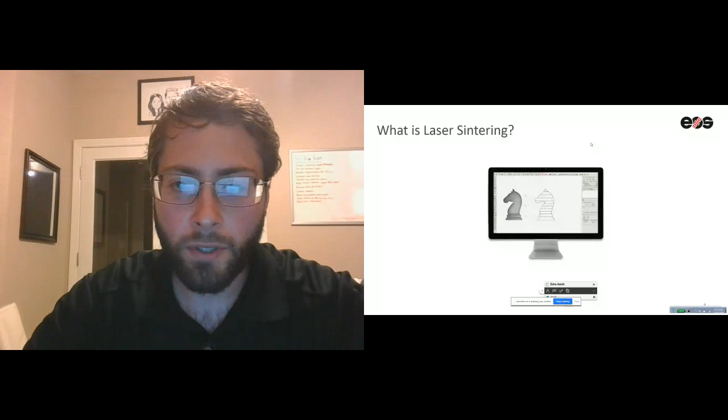So what is laser sintering? How does it differ from other technologies? Well, the first thing is it's powder-based—both polymer and metal, it's a powder-based technology, traditional to how other additive technologies work. We operate from a digital file, usually an STL, which is loaded onto the machine platform.

The way this works is essentially you're building your part in a lowering build platform. So what this means is we're recoating powder into a fine detailed layer, and then using a laser to scan the pattern within the file we're uploading. The platform is lowered roughly every layer—usually most materials are 120 micron layer thicknesses. We recoat either with rollers or recoater bars on some machines, and this process works over and over again until you get your part.

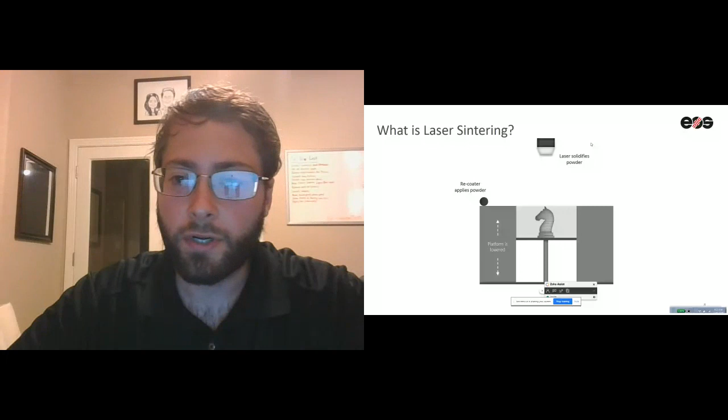As you'll notice, the part is encompassed in powder at the end of your build. So essentially there's no supports required because there's not a bunch of free weight and stresses in your material. Also, at the end, you break your parts out of the free, unmelted powder—you raise your part up to the top and then remove the powder.

So what are the advantages of laser sintering? Some of these are typical of additive manufacturing in general, some are more exaggerated with laser sintering. Lightweighting parts—there's a large material variety in laser sintering, especially in how we can composite our materials to lightweight them. Through design interface, we're able to reduce mass from parts and add mass where more structure is needed, so we can lightweight parts while maintaining performance. Integrated functionality: how can we reduce parts that typically in an assembly might take 30 different parts? How do we reduce this to cut complexity, lead time, and costs in the supply chain and manufacturing assembly, also reducing tooling cost and human cost?

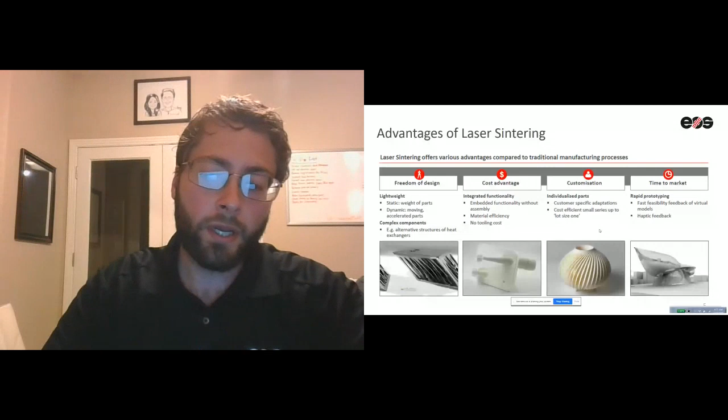Individual parts, so we can build a relatively large amount of parts, but with a very high amount of customization. This is one of the things I'll touch on soon, and also rapid prototyping. How do we then build our designs faster, build our products faster, and validate them via testing and rework?

So that's kind of the technical advantages of additive manufacturing, but the business advantages look very similar. Like I mentioned, redefined NPI process. So what this would mean is, as we're integrating new products, much faster testing, much faster validation, faster turnaround time.

The design for additive consolidation. So basically, how can we improve the way that we assemble parts? How do we reduce the variety and steps it takes to make a part?

Distributed manufacturing is, in a mass customized world, we can then allow ourselves to distribute our manufacturing to different localities to reduce lead times, to reduce logistics costs, and also often to offer customization in an area that may not align with the needs of customers in another area.

And also that just personal customization. How do we take user input data across many different industries? The sports industry is, I think, a very active area right now. How do we take user data and integrate that into a customized part, but also on a mass scale?

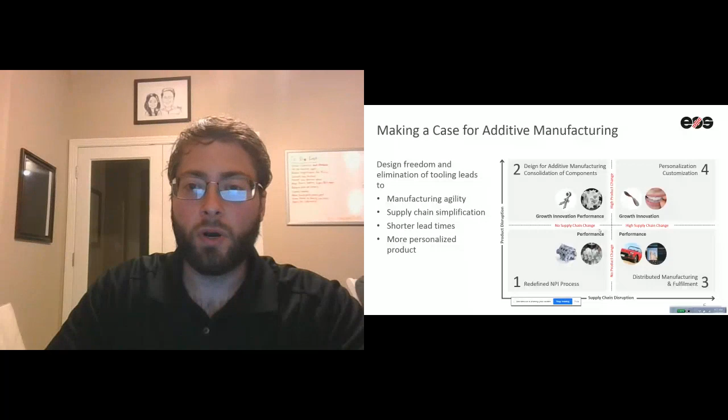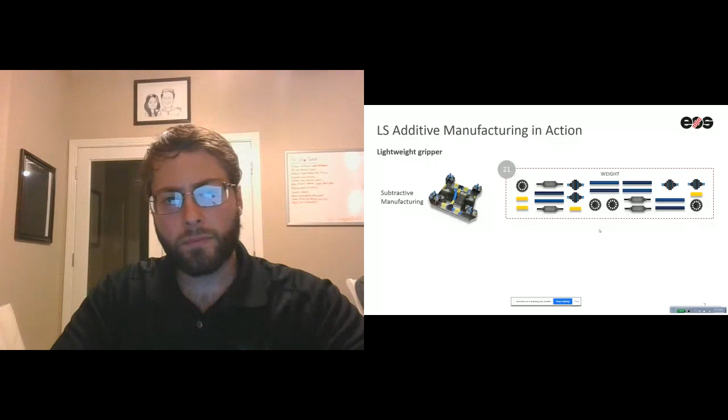So very, very simple application example I put in here just to kind of get my point across. This is a lightweight gripper that we helped redesign. Originally, it had roughly 21 parts because there was a lot of internal piping and hosing that needed to be in this component.

Through those sides, the corners, you essentially have these suction areas that will then allow it to grip on an assembly line and move a specific part around. We were able to work with this team to design these components to internally integrate those channels in the structure, reduce it to a 3-part component, and reduce the assembly and build time to 1 day from 18.

And so that was a huge lead time reduction, a huge weight reduction, 86%. And overall, when you include labor, lead time, and costs of materials, it's over a 50% cost reduction. So why am I talking about plastics today in general?

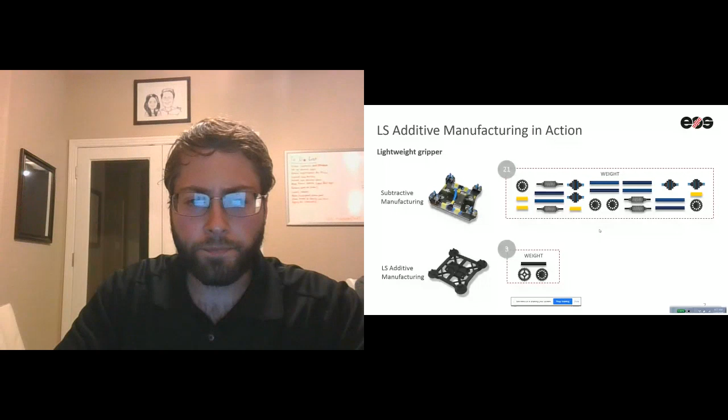Like I mentioned, we have a robust business in metal and plastics. The reason I'm talking about plastics is we see it as a huge opportunity in the industry. So I was looking at the volumes recently of what actual additive manufacturing volume-wise in plastic produces compared to the plastic industry overall. And roughly 1 in every 100,000 pounds of plastic material produced is used in additive manufacturing.

So when we're looking at this industry, it feels like it's growing, and it is growing very quickly. But there's still a huge opportunity just based on the fact that we're only one out of every 100,000 pounds going into our industry, and we think there's a lot of opportunity there.

And what does plastic bring that other technologies doesn't? It brings a lot of customization ability, and a lot of ability to maybe have a base resin, but also build on that base resin by offering different compounds and different things that will allow our customers to really hone in on the application requirements that they have.

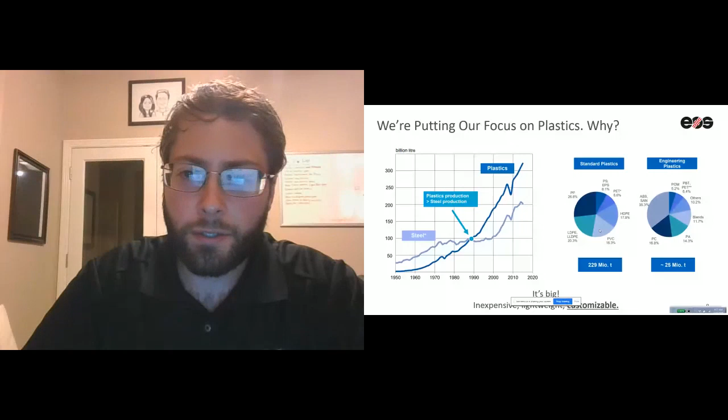So just a graph on the left, you can see this is general plastics versus steel. It's growing very quickly. We think it's going to continue to grow, and that includes standard and engineering plastics.

So what's been holding AM back in the past? Why are we only at one out of every 100,000 pounds in our industry? Well, it's really matching up that material choice with the machine availability that is one issue. So unlocking the ability to have a larger variety of materials in your build process.

There's been a slow growth of additive know-how and design compared to the technology overall, and that's something we need to continue focusing on. Events like this are great because you actually have a much faster adoption of the technology by getting 500 people in the same room watching the same events and learning together. That really accelerates the way that we all understand additive together. And really just a mindset driving that culture.

So at EOS, we do have a focus on new innovation, and we put roughly 15% of our revenue back into R&D. What that allows us to do is take what our customers are currently working on and discovering their needs are, and directly funnel that into our future pipeline so that there's not a lag in our products and a mismatch between customer demand and what we're offering.

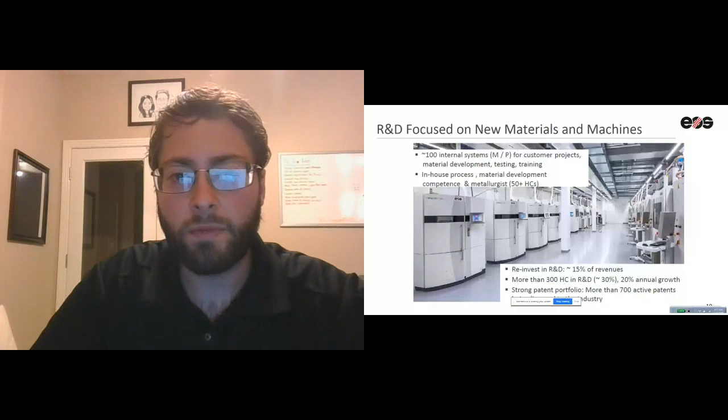So across the globe, largely Germany, and I'm in Texas. Here in Texas we have quite a few machines, and also in Michigan we have over 100 internal machines for building, testing, customer support, material development, parameter development, things like that, that we're actively working on.

So maybe some of you are familiar with our Formiga P110. It's a smaller machine, very fine details, and a very good machine for build features and build detail, all the way up to our production machines, which are larger platform.

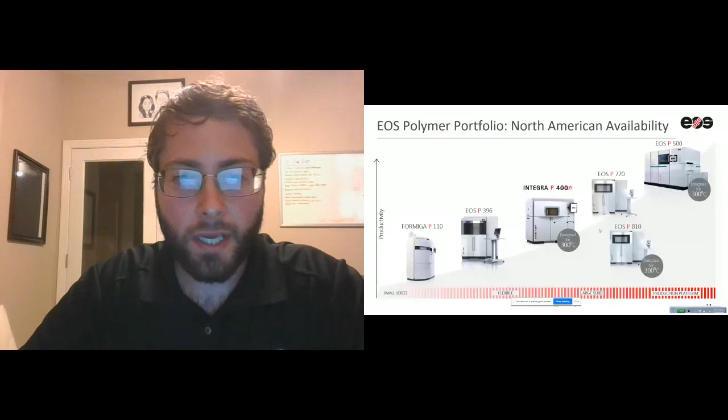And so I think the demand, honestly, of our customers over time has been, hey, we need more flexibility on what materials we can run in which machine. So our newest platforms are an answer to that, where we want to be enabling that material selection through new advanced and more flexible machines that can accommodate that.

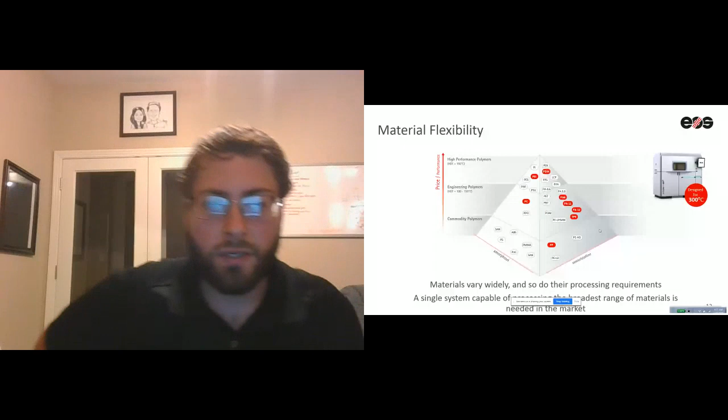And so a single system hasn't been able to this point to accommodate all materials, but we think that as time goes on, that's what our real strategy is, to increase the options that our customers have. So P4, P5, the P400 is released in North America, and we're shipping machines.

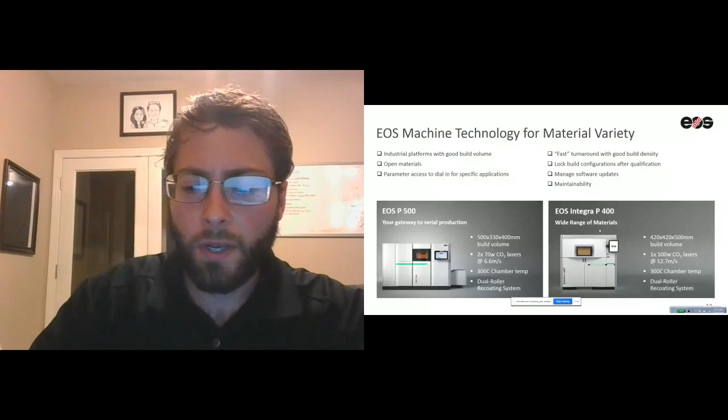That's the machine that we're really leveraging for some of our material development projects with our customers. So it has a roller system and a different powder feeding system and different heating system that's ultra sensitive, allowing us to develop new custom materials on there.

But we're also building into new material spaces, and so we're actively working on things like polypropylenes, which are more of commodity plastics that have not been on the market successfully in the past to release on our platforms, and also the polycarbonates and PA6s, all the way up to the PEKK composites we already have a product on the market. But we're still differentiating via the ability to change our filler content and the way we process parts to meet very specific opportunities of our customers.

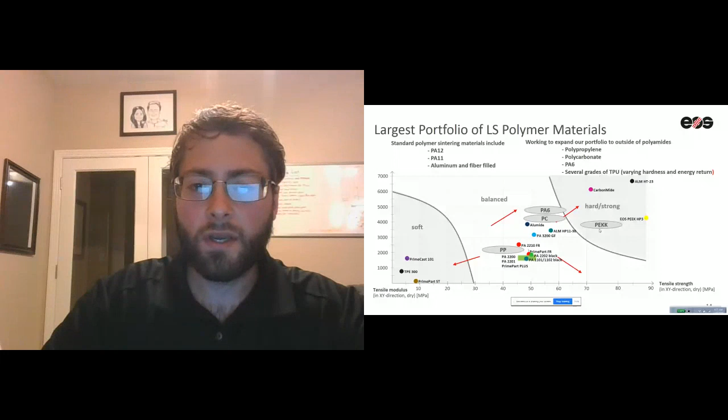One point I wanted to drive home is we're working on enabling a lot of different resin technologies on our machine. But really, if you take a step back, the base resin is just the beginning of the development. Take a PA11, for example. A nylon 11 has a relatively specific mechanical property range, temperature range, stiffness range, things of that sort.

It's only when you start looking into the filler content that we actually can unlock a lot of ability to customize for a specific application. Some customers want a material that is extremely stiff with no give whatsoever, and we have fillers for that, and we have processes to produce that material. Some don't - some need an ESD material, things like that.

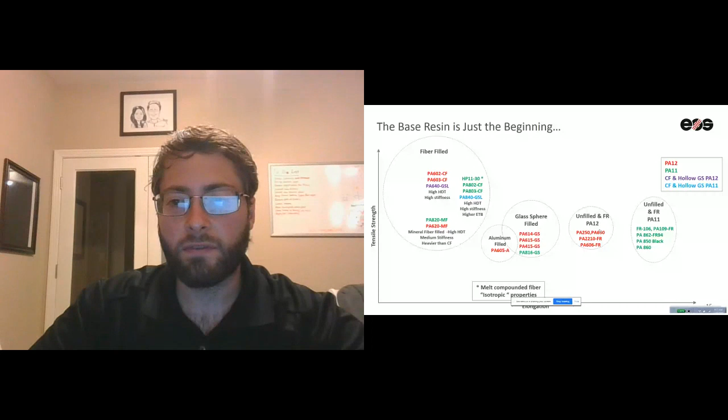So some of the material classifications that we generally work on are conductive. Often customers need jigs, fixtures, things like that, that are electrostatically dissipating, that don't build up charge and then dissipate rapidly - something that can continually not build up charge and release charge as that builds.

Flame retardancy is something we're continually building new flame retardant materials for applications. Different applications, such as aerospace, tend to use different flame retardant technology that maybe isn't appropriate for consumer electronics, and then there's consumer electronic type applications, which is different. UV stability, lubricated materials for high friction environments where we need to reduce wear on the surface, and generally reinforced materials for improving tensile strength, stiffness, and things like that.

One point I also wanted to make, one question we get a lot in discussions we continually have, is the injection molding conversation. I think this was made several times in a couple other talks during this conference I've seen.

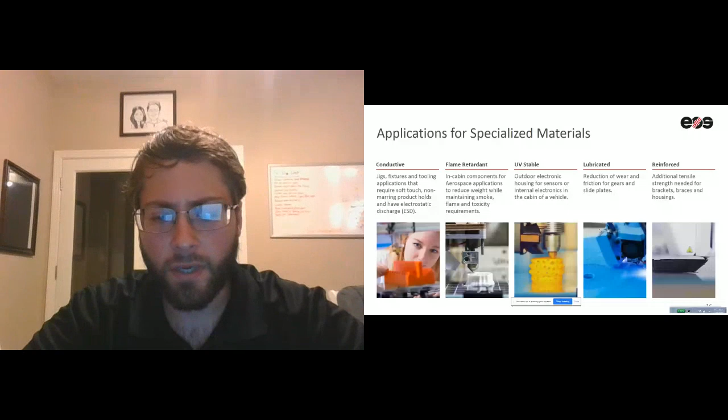3D printing, and laser sintering also, is not necessarily a direct replacement for all injection molding applications. It can be extremely complementary, whether it's a low to mid-size build for something that's ultimately going to be ramped up, or something that's never going to be ramped up because of the complexity of the parts, the turnaround time necessary, or the continual innovation on those parts. So we strongly believe it's not always one or the other.

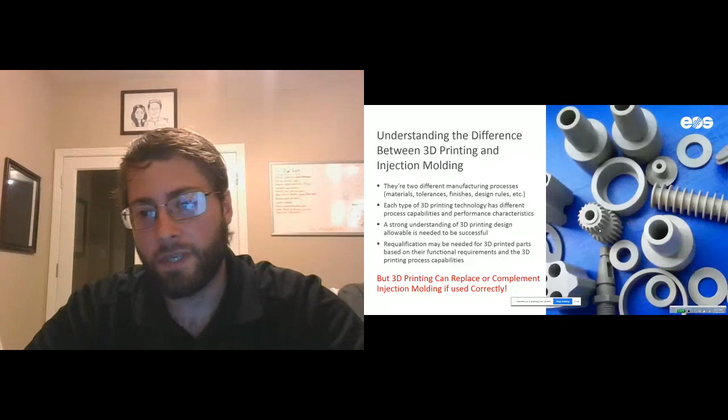They're often complementary. When we talk about materials, there very rarely is an injection molding material that is one-to-one with a laser sintering material. So when we're talking about a PA6 that's been in an auto spec for 50 years, it's not necessarily that if you find a way to powderize that material and throw it in a machine that you're going to get the same part performance. It could be that a completely different material with a filler content in it can achieve that same performance, but it might be a different base resin or something like that.

So what we're really focusing on is how do we help go from a concept with these toolboxes I've kind of overviewed in the past slides? How do we go from an idea, an application idea or application requirements, into understanding if our technology is going to be a good fit?

One way we do this is our applications group, Additive Minds, works with our customers to help understand not just the technology fit, but also the business case fit, and how we actually understand the costs from a holistic perspective besides just material, and how we understand the costs of integrating additive, and how we do that effectively. Often it's the case that we don't just need to show that we can build a part that meets a spec.

We also need to help qualify those parts internally for our customers. This is something we do a lot of work with our customers on, to not only drive the getting started on the applications and the part portfolio evaluation, but we also drive it through helping to set up facilities, production planning, and monitoring machine part performance.

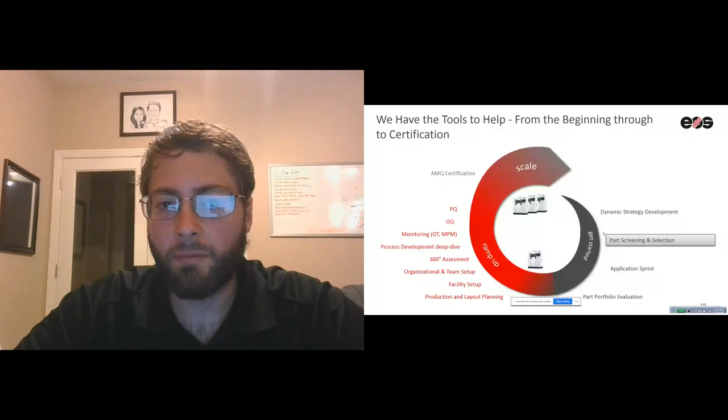The way we typically do this is by developing a custom development path for each application, for each customer, helping to screen the specific application and develop that through a custom roadmap, ramping up production, and certifying and scaling production. Often we're also able to assist with the ramp up of production by setting up a kind of internal incubator hub in which we'll develop the entire production process with our customers, and then transfer that process to them so there's less issues with the transfer and more knowledge share.

One of the ways we do that is helping to understand the cost internally for our customers, and how to generate value from building an additive part that maybe traditionally was built another way. Of course there's an added cost up front of additive manufacturing, some of the materials tend to be more expensive, things like that. But by improving upon the life cycle, the part performance, and things like that, we can achieve a net value if we're looking at our leading indicators and differentiators to help add that value. So there's a lot of value to be gained, but often you have to go and find it with additive.

Some of that comes through leveraging our ability to have almost limitless complexity. So parts that are high surface area to volume, things that traditionally you can't just pop into an injection molder or machining machine and build those parts. Customized lightweight construction and individualization are some of the things we really capitalize on to build that value.

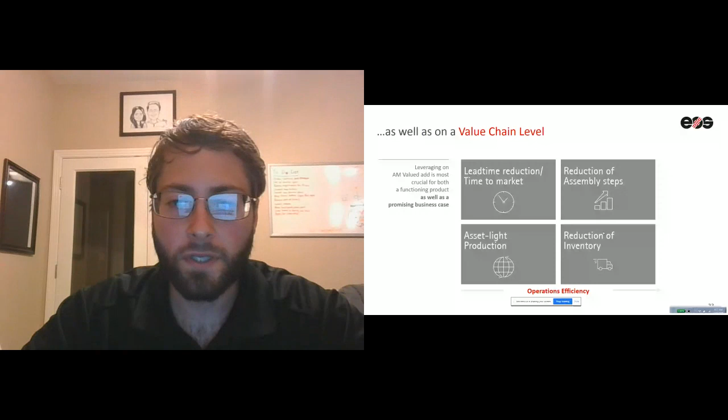On the value chain side, we capture that lead time reduction and reduction of assembly steps. I talked about that a little bit earlier. But it's really also not just a bill of materials comparison, like oh, this one's cheaper than this. It really comes down to the human capital, the ability to innovate, the reduction in inventory which frees up much more capital in our hands, and having generally less money tied up in production and storage of parts and spare parts.

So a typical roadmap would look like sitting down with a customer, understanding their applications, defining a project team, enabling through trainings and design for additive manufacturing understanding, but also digging deep into how we design our factory layouts, and what technical requirements the facility needs first in order to really streamline production in the future when production is on its feet and going at full speed.

And then we also work on application development and process parameters specific to that application and environment. That's often where some of the custom material development to meet a specific need comes in. Maybe we have a standard product that is within range of what we need for our application. Well, we have quite a few knobs and things we can tune on our material and process to capture the performance we need for a given product.

So I just wanted to highlight, since I think I've only got a few minutes left, an example of this, a recent example that we've been working on for quite some time, a year or two here at EOS.

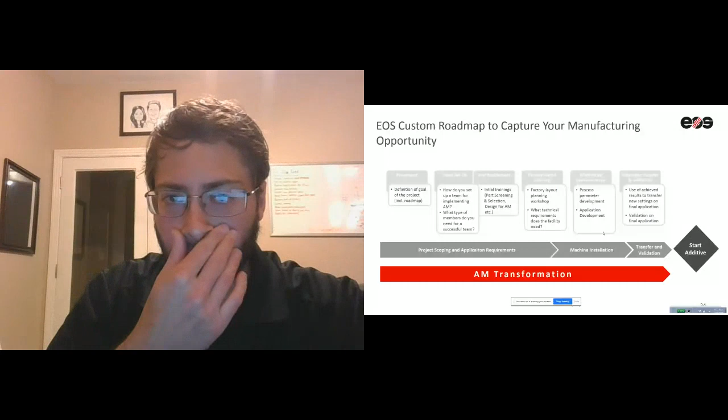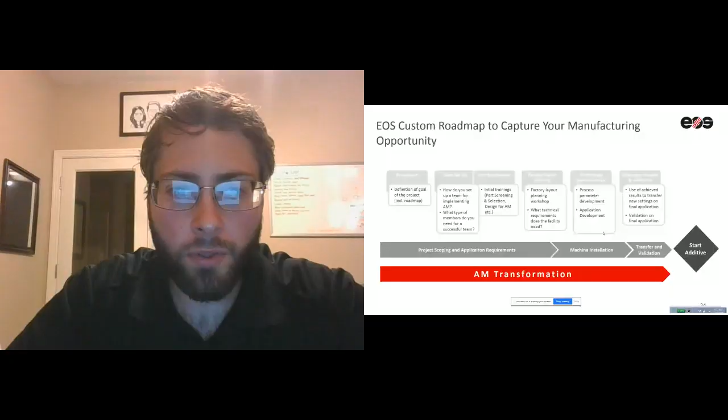Aetrex, some of you on the line may have heard of Aetrex before. Aetrex is a company that produces high quality custom orthotic insoles for their customers, and this is a very time consuming and costly process. It's traditionally custom to their customers, but you're pretty much starting from scratch every time making these very custom products. So the issue is that over time, the lead times of these products are much higher, and the cost tends to be higher.

It's really a perfect application for laser sintering, because we're able to take those inputs from our customers - what foot contours they have, what needs they have - and funnel those into a build setup and build them on more of a mass scale. So we can maybe build 100 or so of these at one time, on a mass level.

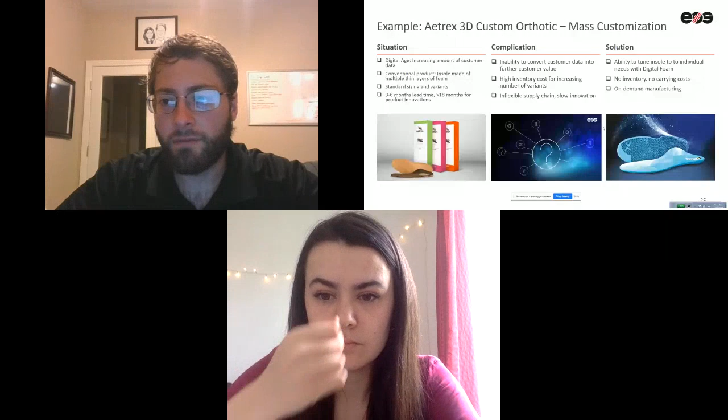So we've teamed up with Aetrex, and basically the way we're doing this is through Aetrex foot scanners. What will happen is a user steps into these foot scanners, does a number of different stances and things like that in the scanner, and it will read the pressure reading on the bottom of your feet. We've developed an algorithm to take that pressure reading and translate that into unit cell geometries on the bottom of the sole.

That will then translate into the amount of pressure the sole puts back onto the bottom of your foot. So essentially that is as customized as you get, from taking a reading all the way to building a specific part to balance out your specific pressure profile. And what that's allowed us to do is really reduce the lead time to just several days to a week, where it was a month to two month or several month process.

This also allows the customer to order, as time goes on, new insoles that are responsive to the changes in the user. Cary, can you hear me?

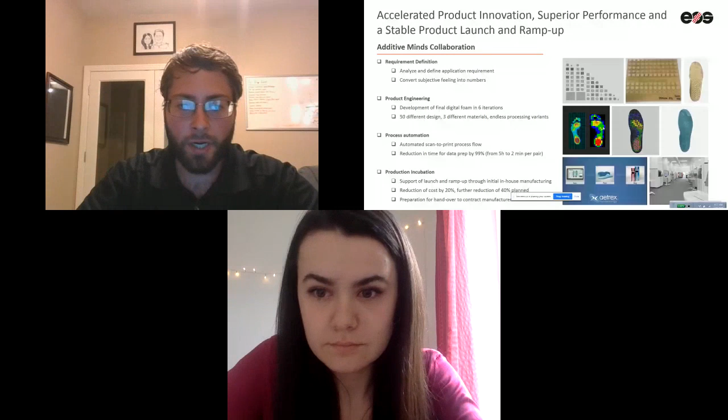Okay, so the most voted question is: is EOS adopting an open source material platform to enable faster innovations in application-specific material?

That's a very good question. Our general trend is towards allowing, or enabling, more materials on our machines in any way that we can. The one caveat to that is understanding the effect that any material can have on a machine. Some materials that are relatively unknown can cause damage on a machine and things like that. So the way we're doing that is really a hands-on approach to enabling our customers, and yes, opening our machines up much more to allow those custom parameters to be tried on third-party materials and things like that.